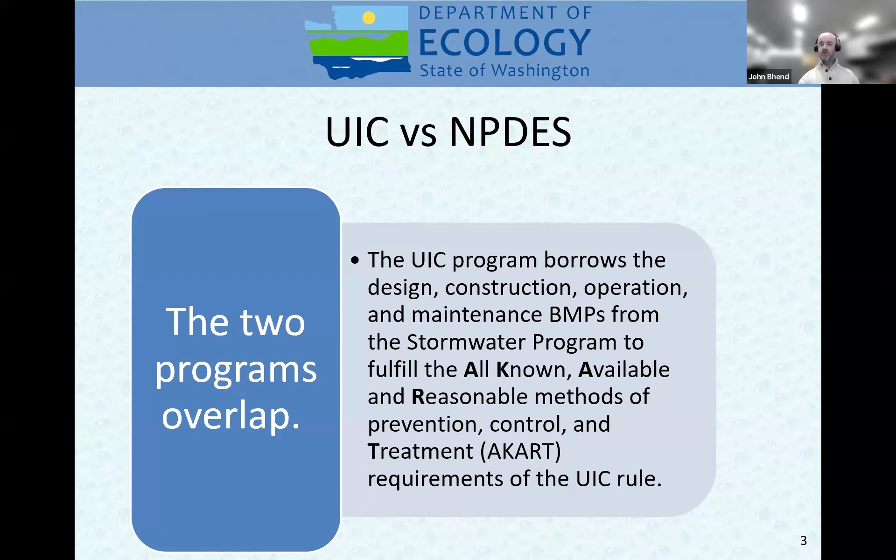The term best management practices typically applies to non-point sources of pollution and is considered to be a subset of the AKART requirements. And the UIC rule is 173-218 WAC, underground injection control. The guidance for UIC wells that manage stormwater was developed in 2006. These guidelines were later incorporated into the stormwater management manuals for both Eastern and Western Washington. Currently, volume 1-4 of the 2024 SWMM for Western Washington includes these guidelines, and for Eastern Washington, it's in Chapter 5 of the 2024 SWMM.

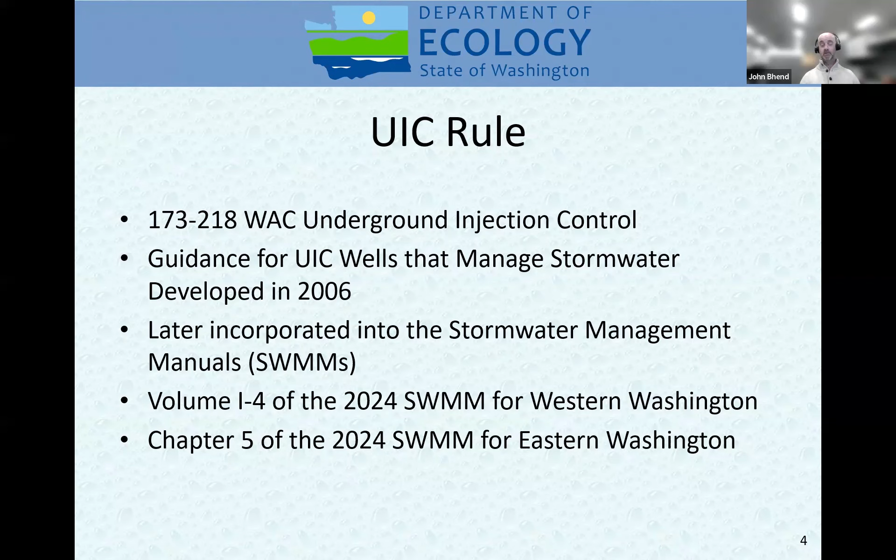Some of the requirements for use of UICs: there's no thresholds or minimum disturbed area for sites when UICs are used. There's also a requirement to retain all runoff on site, and this is from the modeled 100-year storm. And there's also requirements to treat and infiltrate all runoff. And there's some things that are not addressed by the SWMM's UIC program guidelines. This includes UIC wells that receive fluids other than stormwater. That's not managed under the UIC program. And this precludes accidental spills or illicit discharges to the stormwater system.

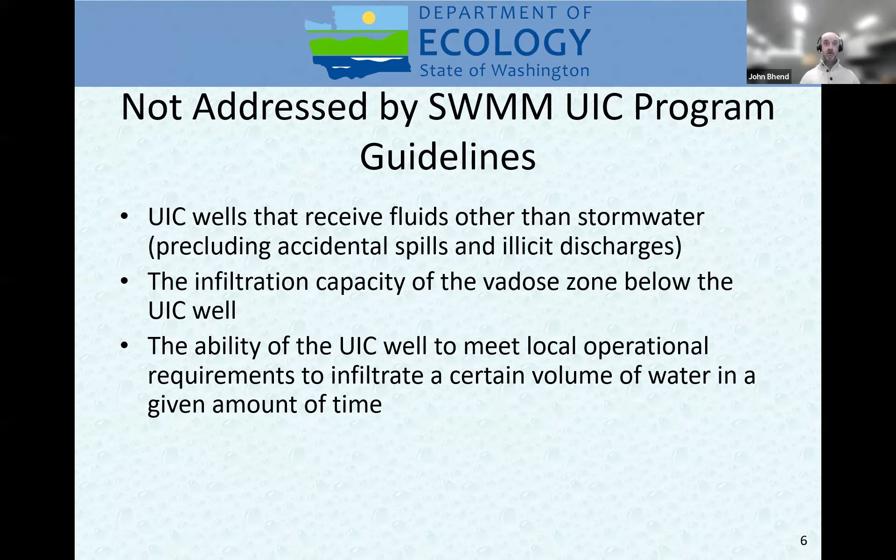Also not addressed is the infiltration capacity of the vadose zone below the UIC well, or the ability of the UIC well to meet local operational requirements to infiltrate a certain volume of water in a given amount of time. And I want to stop now in this section to see if anybody has any questions before moving on to the next slides.

One example are sites that are undergoing remediation, contaminated sites where the material being injected is actually there to treat residual groundwater contamination. Other times, UICs may be used to discharge different types of process waste, industrial wastewater, but that usually requires those discharges to be permitted through a state waste discharge permit. But those are a couple of other instances or substances that can be discharged through a UIC well.

And I have a question in the chat. If the infiltration capacity of the vadose zone is not addressed in the SWMM UIC program, is it addressed elsewhere? Yes, it would be addressed in a discussion of the actual BMPs. I think it's going to be in volume 5 of the SWMM. There might be different volumes and chapters in the Western Washington version and the Eastern Washington version, but that's where the infiltration capacity would be assessed. The UIC program is mainly looking at making sure that discharges meet the non-endangerment standard for groundwater, which will be discussed in the upcoming set of slides.

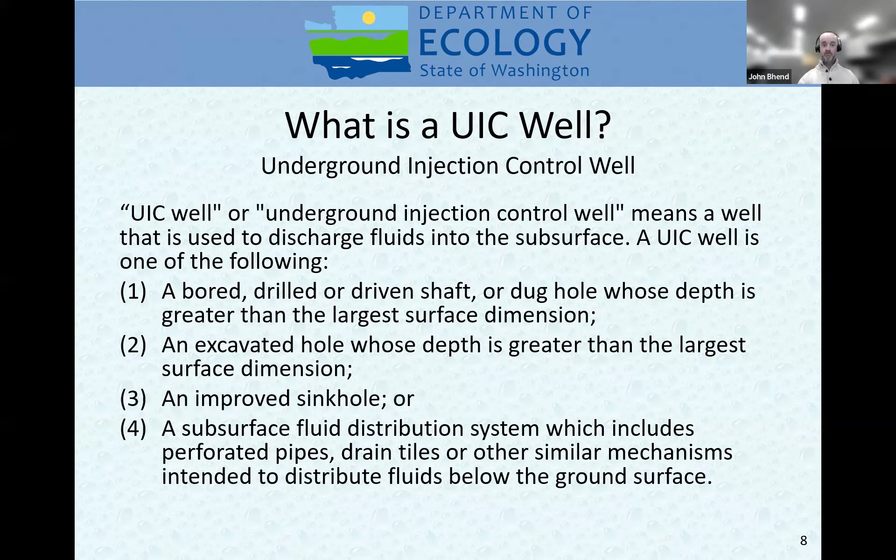Examples of UIC wells include dry wells, drain fields, infiltration trenches if they include a perforated pipe, storm chamber systems with the intent to infiltrate, French drain systems designed in part to discharge surface water to the ground, and bioretention systems intending to infiltrate water from a perforated pipe below the treatment zone.

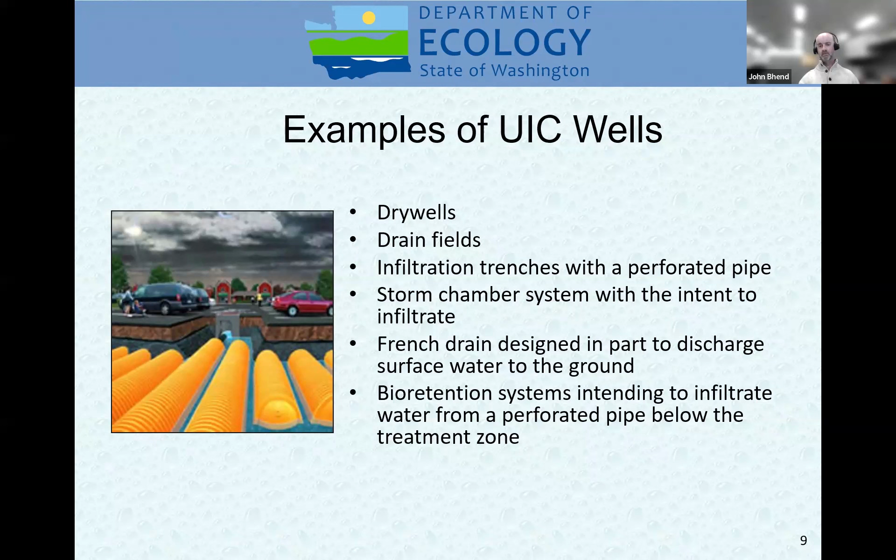These are becoming more common under parking lots of commercial properties where they want to maximize the footprint of the development, and they don't want the drainage area to include areas of the property that can either be parking lots or buildings. These types of wells are termed Class 5 UIC wells, which are wells that are used to manage stormwater, and the majority of these are less than 20 feet deep.

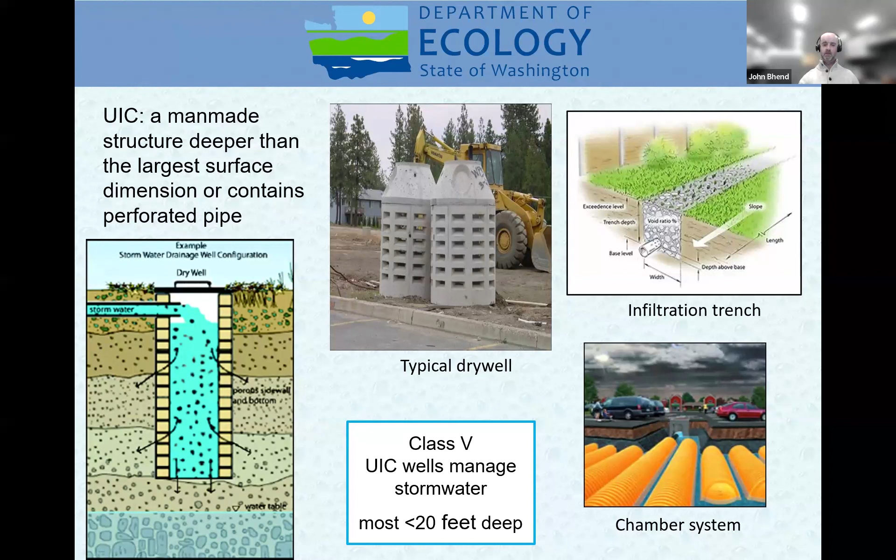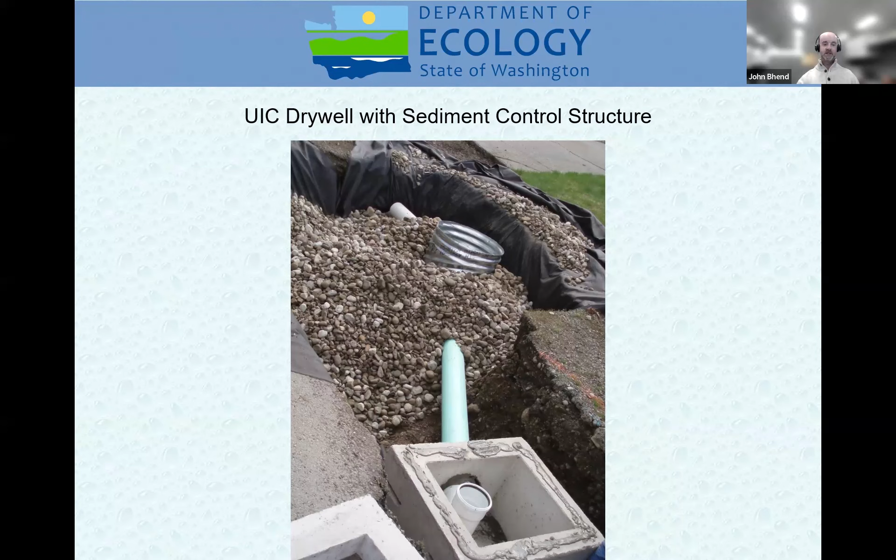Oh, and I see a question in the chat. Is a storm chamber called a UIC well, even though it is wider than it is deep? The main reason why we include storm chambers is they include an assemblage of underground pipes intended to distribute surface water. So that's the reason why they get lumped into the category of UIC wells, because these are kind of, I guess you would call them open bottom pipes, but they are still a system that helps distribute the surface water runoff or the stormwater runoff.

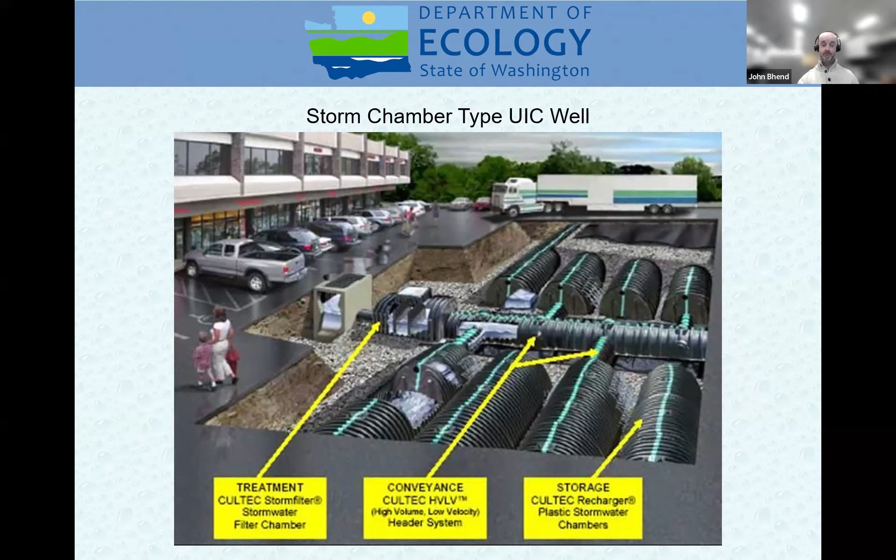This slide shows a cross section of a typical UIC well system. In this case, we have a vegetated pre-treatment zone where the water goes from there into a sediment control structure. And then you have the flow going into the well itself. Typically, the base of the well is above the seasonal high groundwater zone. And typically on a lot of the shallow UIC wells, they discharge the stormwater above a confining layer. So this is a clay confining layer.

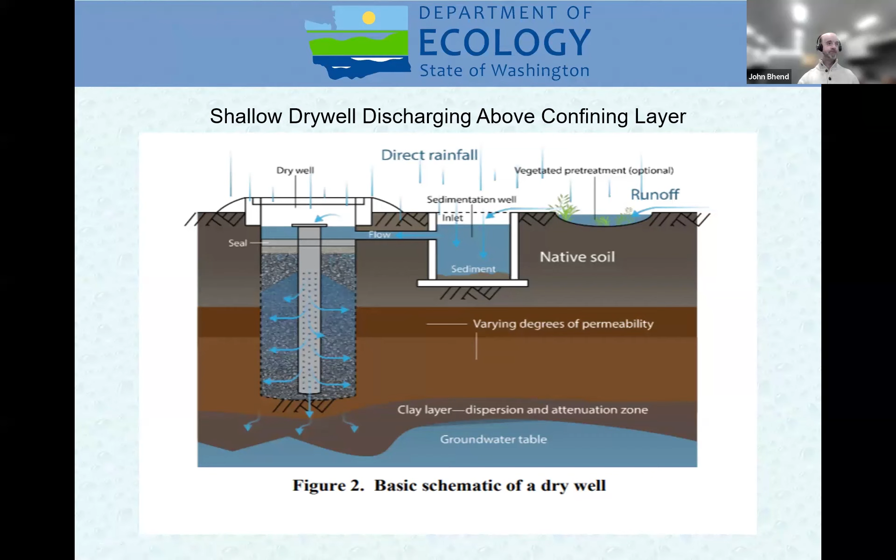I want to go over some examples of things that are not considered to be UICs. Buried pipe and/or tile networks that serve to collect water and discharge that water to a conveyance system and to surface water, so it's not being conveyed to the subsurface. Also, surface infiltration ponds and flow dispersion stormwater facilities, primarily because their surface diameter is greater than their depth. Also, infiltration trenches that do not contain perforated pipe or a similar mechanism.

Another category that is not is permeable pavement. This includes porous asphalt, pervious concrete, and permeable interlocking pavement and aggregate pavers. In almost all circumstances, the surface diameter or width of these structures is much greater than the depth, and that's one of the reasons why they are not considered to be UICs.

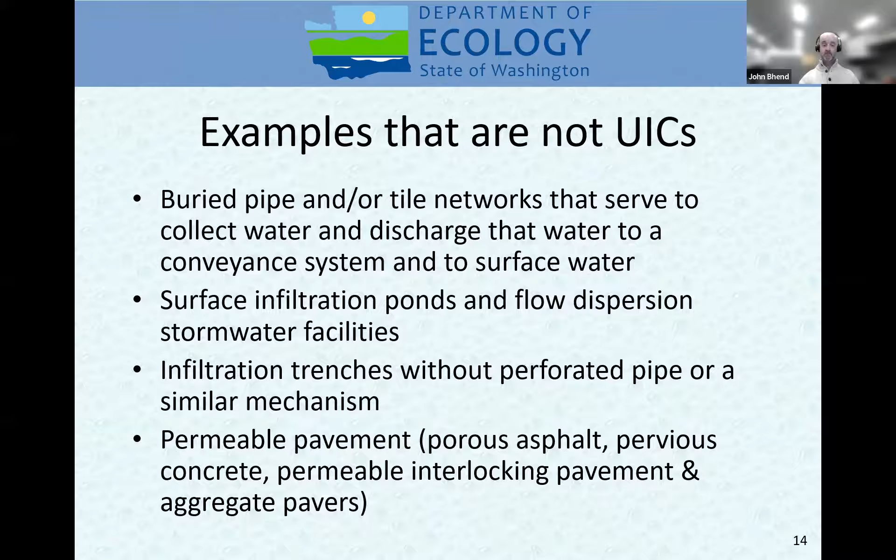Yeah, there are some exclusions or exemptions for those types of systems. Those types of systems would require a permit, so they would not go through the UIC program for rule authorization.

Now I want to talk about the rule authorization requirements. The first requirement is registration of UIC wells with Ecology. There are two types. One is new wells, and new wells are considered to be constructed on or after February 3rd of 2006.

And these must be registered 60 days prior to construction. And that gives Ecology enough time to do a proper review of the registration materials, and also in some circumstances to be able to notify other interested parties. A lot of times it could be different types of water purveyors, and if the UIC well is located within one of their wellhead protection areas, depending on the type of facility, they will require notification.

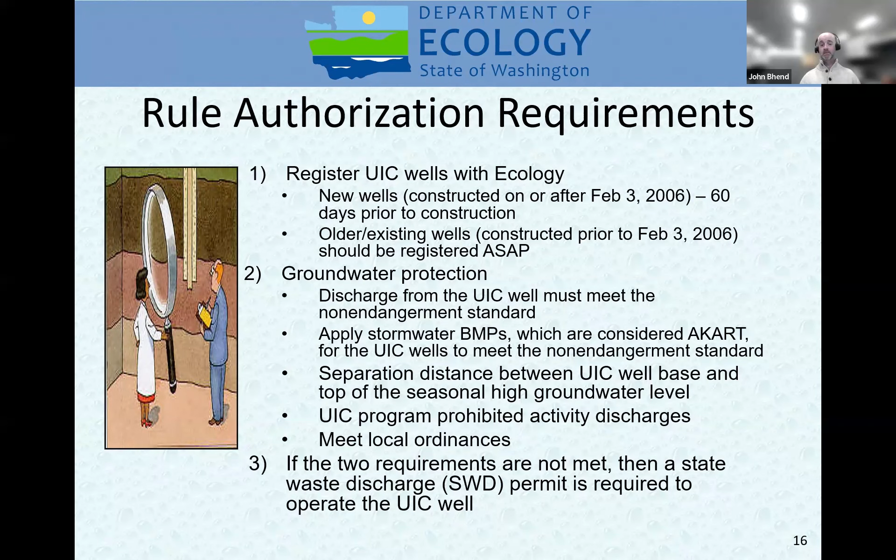There are also some exemptions from UIC registration. UIC wells at single-family homes or duplexes receiving stormwater runoff only from residential roofs are exempt from registration. Also UIC wells used to control basement flooding, because then you're looking at a shallow groundwater issue, which is what's getting into the UIC well, and not stormwater runoff from a potential pollution generating surface.

Also, storm drain components that contain perforated pipes but are intended to convey stormwater to a surface water body. Then other non-UIC wells include infiltration ponds, dispersion systems, or infiltration trenches that do not contain perforated pipes.

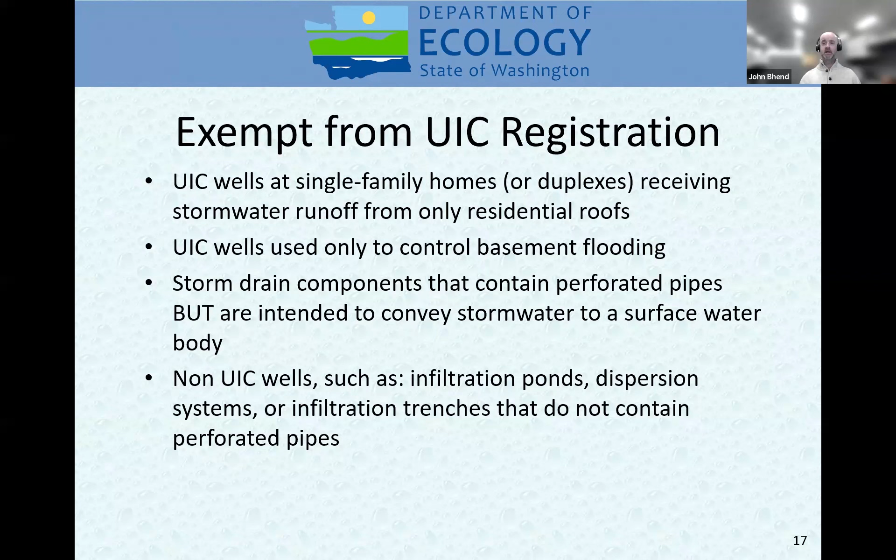And there's a couple of different approaches to meet the non-endangerment standard for new UIC wells. One approach is called the presumptive approach. And this presumes compliance with the non-endangerment standard when applied BMPs, including the potential treatment capacity of the vadose zone beneath the UIC well, are expected to eliminate or reduce concentrations of the pollutants of concern.

Now, this approach may not be used when none of the source control or treatment BMPs in the manual are expected to eliminate or reduce pollutant concentrations. And these are typically higher risk sites with greater potential for petroleum product or hazardous chemical releases.

And then the second approach is the demonstrative approach. And this approach must address the following topics: a site-specific analysis of pollutant loading, including a risk assessment of down-gradient and adjacent drinking water sources. It also includes a site-specific analysis of the treatment capacity of the vadose zone.

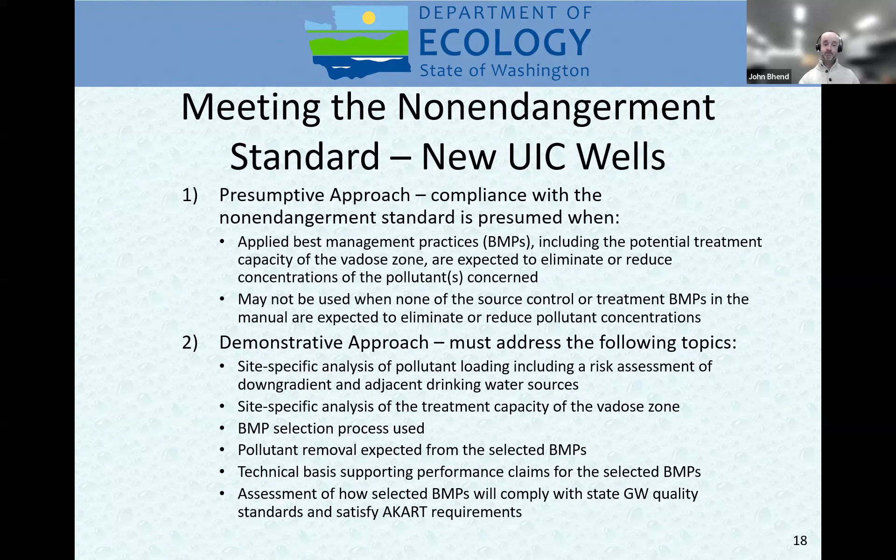And for meeting the non-endangerment standard for existing wells, and again, these are wells constructed prior to February 3rd of 2006, we ask that UIC registrants complete a well assessment to evaluate the potential risk to groundwater from the use of the UIC well. And that would include the following: description of the land use activities around the well, the local geology, an assessment of the depth to groundwater table in relation to the UIC well base, and an assessment of whether the UIC well is located within a groundwater protection area.

We also ask that they either create or provide an existing stormwater pollution prevention plan, and this is more common on industrial sites that have petroleum product or chemical storage areas. We want to know what source control BMPs are in place to help ensure that impacted stormwater is not making its way into the UIC wells.

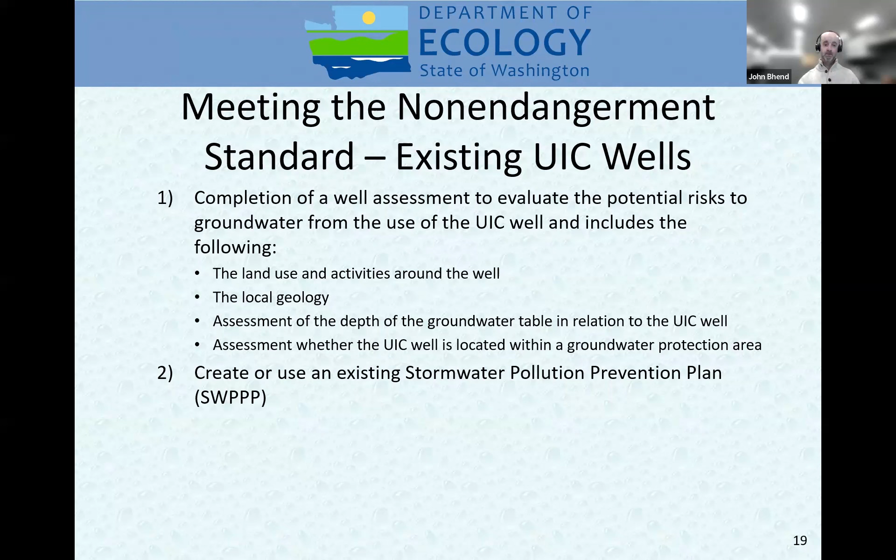And there's also some requirements for meeting the non-endangerment standard for municipal sites. And I want to say that the UIC program rules apply to Class 5 wells that receive stormwater regardless of whether a UIC well is located in a municipality permitted under a Phase 1 or Phase 2 municipal stormwater permit.

Also, when the overflow or discharge from a UIC well drains to an MS4, municipal separate storm sewer system, the MS4 permit does authorize the discharge from the UIC well, but the UIC well must be registered and rule authorized or have a state waste discharge permit. This happens when the UIC well is designed to only infiltrate, say, 50, 80, 90% of the water, and the overflow goes to a different system that discharges to surface water.

The UIC wells also must be included in a stormwater management program. And if there is no stormwater management program for that municipality, the municipalities must conduct a well assessment and create a stormwater site plan for the area served by each municipal UIC well.

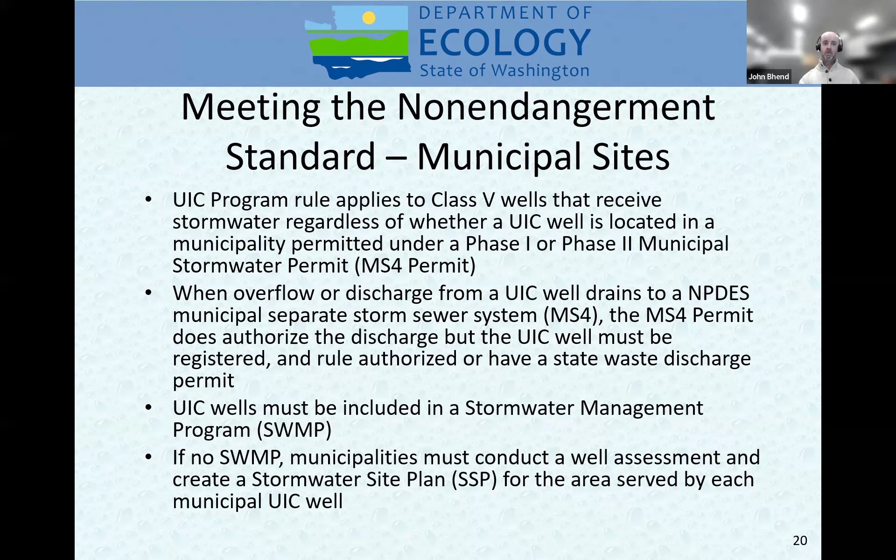There is also a requirement of notification of water purveyors. The water purveyors have been requesting notification of all UIC wells prior to construction for UIC wells that are located on properties within their wellhead protection areas. Because of this, the UIC program will request that the UIC registration applicant notify the water purveyors and provide documentation of the notification as a condition for obtaining rule authorization.

And when applicants go on to the UIC registration app, there are links to the Department of Health source water mapping site that will show on a zoomable GIS map where the different wellhead protection areas are across the state of Washington. And the applicants can just put in the address of the site and find out whether or not their UICs are located within a wellhead protection area.

And the Department of Health mapping application also includes links to the actual water purveyors in order for the UIC registration applicant to be able to contact them. And we typically ask that people do this notification via email, and then they can upload a PDF version of the email to the UIC registration, and that would suffice for the notification.

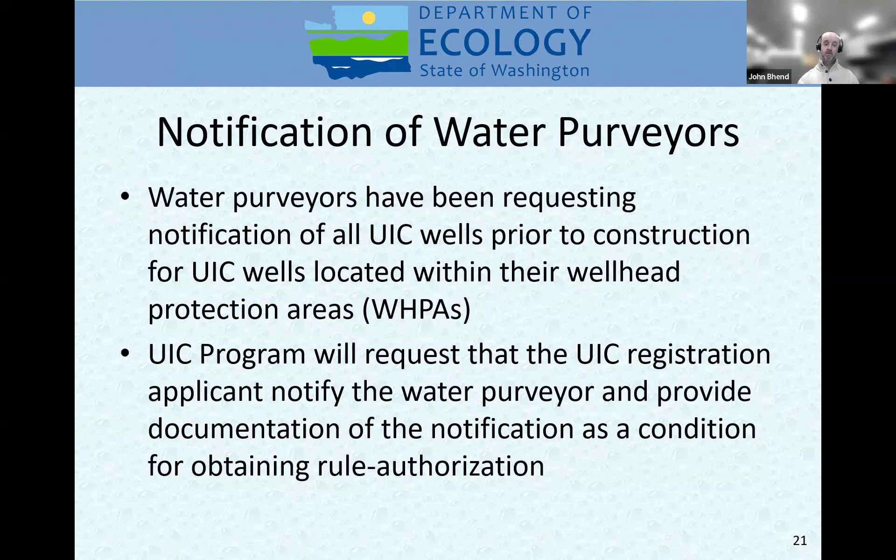And one other thing I want to talk about is a different type of UIC well, and these are termed deep UIC wells. One of the conditions for this is the well extends below an upper confining zone and discharges to an underlying vadose zone. So the example on the left shows the well penetrating the lodgement till layer and discharging into the advance outwash.

And these wells are almost always drilled. They can be 2 to 3 feet in diameter. They're typically backfilled with pea gravel. Some versions of these wells may include a conveyance pipe in the center of the drilled borehole. And they also include a piezometer for water level monitoring.

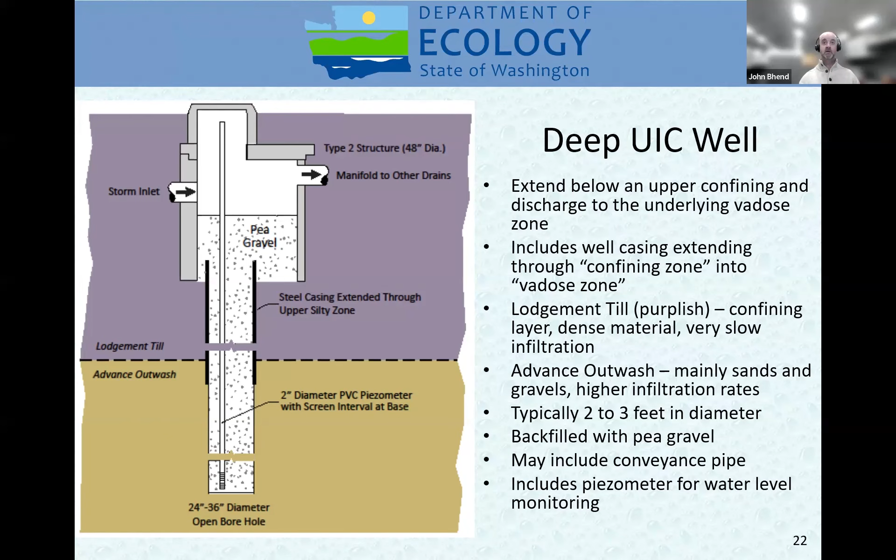And these are typically used at larger area sites where the surface materials, the till or silt, clay-rich soils, don't allow for enough infiltration for the volume of runoff being generated. And because these wells penetrate the upper confining zone and discharge into the underlying outwash zone, which is typically where municipal water wells may be screened, there's additional requirements for these wells.

And these are discussed in Volume 1-4.15 of the Stormwater Management Manual for Western Washington, and they're also discussed in the manual for Eastern Washington. And I want to go over a list of some of the requirements that are in addition to the shallow stormwater UIC wells that we've been talking about. It requires completion of a hydrogeologic study.

It requires an O&M manual and a landscape management plan and a listing of source control BMPs. There is also a minimum requirement of a 15-foot separation distance between the base of the dry well of the deep UIC well and the surface of the seasonal high groundwater table. This is in excess of the 5-foot separation distance for the shallow UIC wells that discharge above that confining layer.

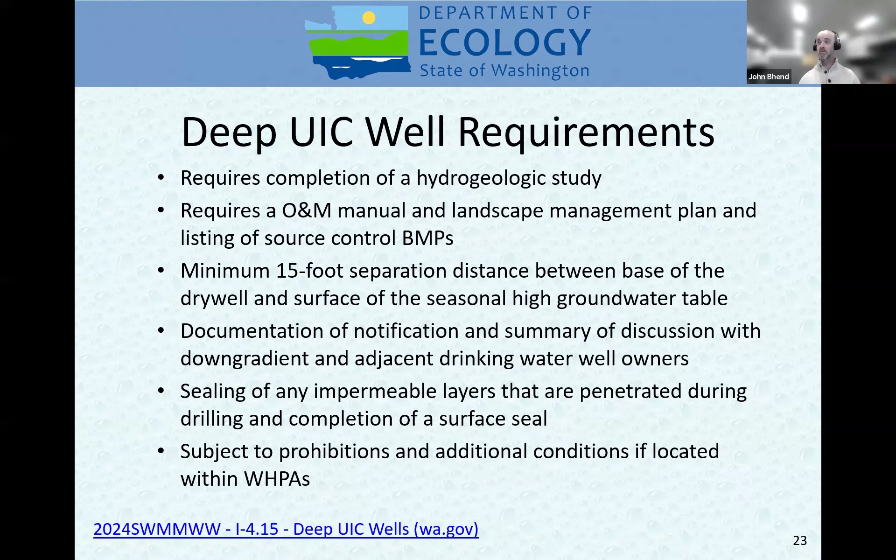And I want to talk now about how the UIC treatment is determined. So we're basically looking at land use and pollutant loading evaluation. Pollution loading is screened from insignificant to high, and it's based on average daily traffic. And then we look at the vadose zone treatment evaluation. And that's rated from none to high treatment.

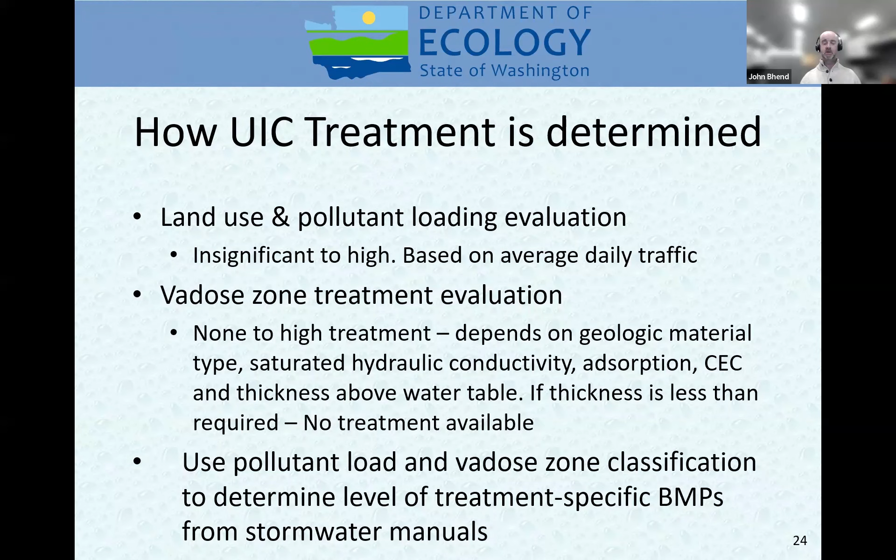And that depends on the geologic material type, the saturated hydraulic conductivity, adsorption capacity of the soil, cation exchange capacity, and the thickness of that unsaturated soil zone above the water table. If the thickness is less than required, then no treatment is considered to be available. And we use the pollutant load and vadose zone classification to determine the level of treatment specific BMPs from the stormwater manuals. And I'll go into more detail on the next few slides.

So this slide gives you a description of the vadose zone treatment capacity for high and medium rated materials. So the high treatment zone capacity, that's related to more when you've got clay-rich soils, silt-rich soils. And these soils generally have a higher cation exchange capacity and a lower saturated hydraulic conductivity. So you're basically getting slower movement of the stormwater through the soil zone, and you're getting a higher level of treatment. And these soils can also have a higher organic content, which will help filter out petroleum hydrocarbons.

And then when you get into the medium treatment zone capacity, then you're getting less silt and clay, and you're getting more into the different types of sands. So you're looking at a little bit higher hydraulic conductivity, a little bit lower cation exchange, and a lower organic content. And then as you go down to low and none, you're getting into gradually coarser sands and gravels with no cation exchange capacity and no organic content. And when you're getting down to a category that has none, you're looking at gravels and cobbles, basically.

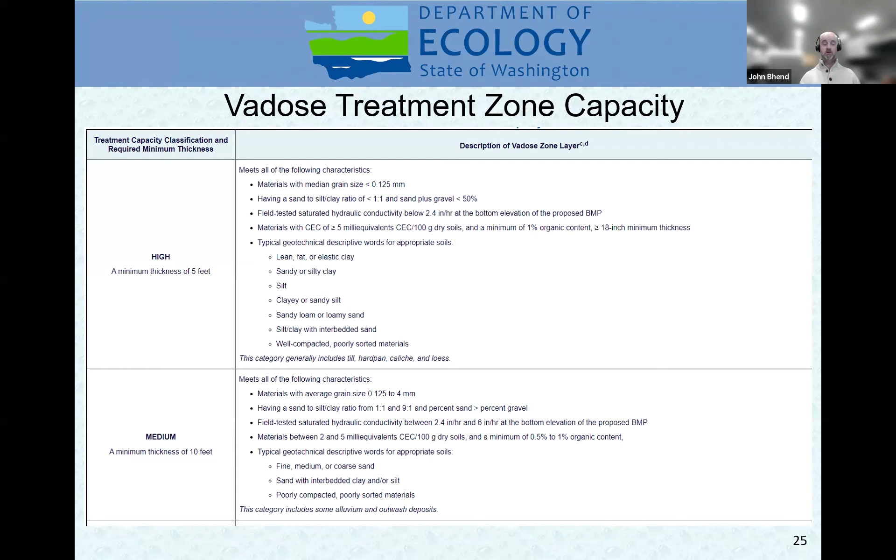And one thing I kind of want to note is when you get into the high category, then you're looking at additional treatment and potential for removal of oil. So we look at the vadose capacity, the pollutant loading classification, and then the next slide, we get to the matrix of determining what type of treatment is required for solids, oils, and metals.

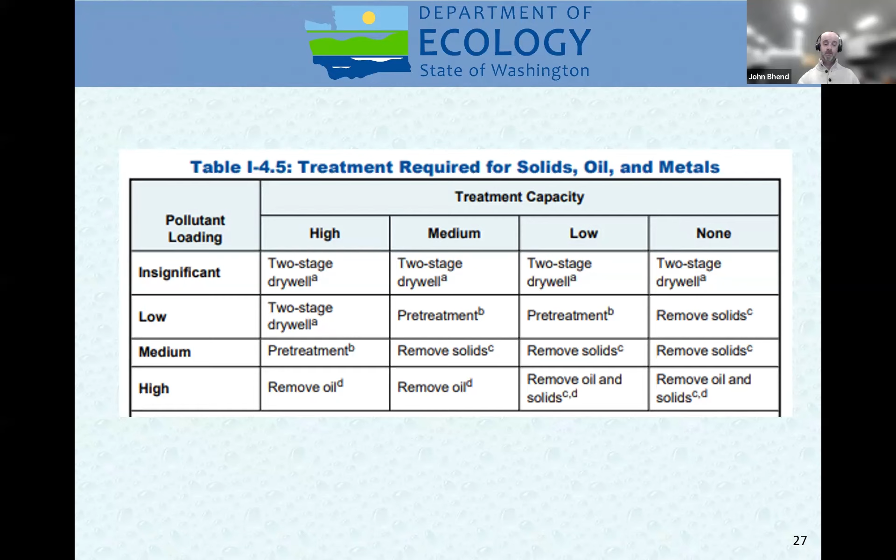And this kind of concludes my presentation, and it kind of gives a good run through of what the UIC program is looking at when we are reviewing UIC registrations. And I kind of want to open it up to anybody that might have some additional questions.

Yeah, basically, there's a UIC closure form that can be downloaded from the UIC registration app. And that just needs to be filled out and submitted. And then we can close that well on our database or change the status to closed. And then there's some requirements for proper, I guess, decommissioning of the UIC well, and that's discussed in the UIC rule.

Okay, then I've got another question of what action should cities take if they suspect they have UIC wells that do not meet the standards? I think one thing would be to look at, if they don't meet the standards, what we would probably be asking, because a lot of the existing wells were constructed before the current requirements were in place. So then we look at having them do a well assessment and then look at the pollutant loading potential of the site. And if it still looks like the UIC wells would not meet the non-endangerment standard,